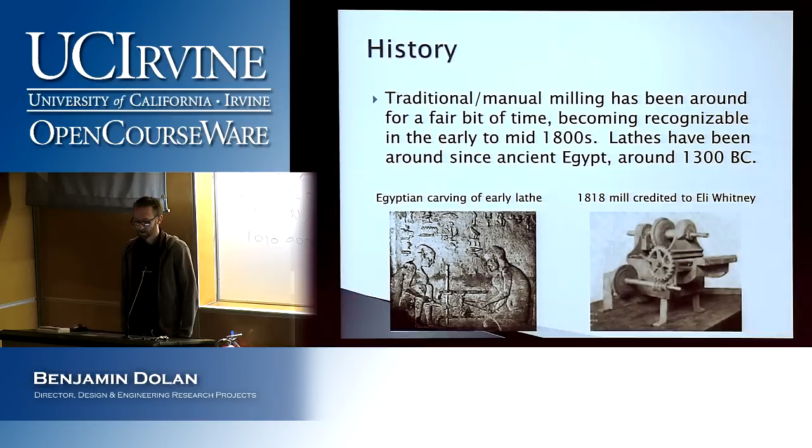So what really moved us from manual machining to CNC machining? That's national defense dollars, right? Anytime you can get the defense to say, hey, we need this, that technology is going to move quite a bit faster because they can put all sorts of money behind it. So it really kicked off after and around World War II.

And immediately after World War II, they were looking at, okay, computer numerically controlled machine, what can we do? And it used to just be called a numerically controlled machine. And we added the computer part around 1952. And that first machine, I'm not certain that the one on the bottom right is actually the first machine, but they ran off of old punch cards.

So you would have tape cards or punch cards, with a whole bunch of little pinpricks in them, and the machine would read that and translate that to instructions. They were apparently not terribly popular. You had generations of people that were used to manually milling everything, and now you're telling them, hey, you got to use this computer and this long tape with a bunch of holes punched in it to do what you're already doing. So it took a while to catch on, and it wasn't until the 80s when we got really closer to what we have now as CNC machining.

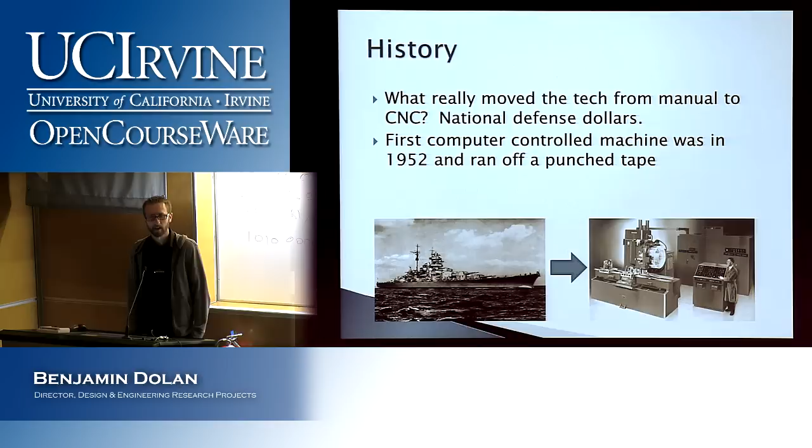So why would we do it? It is a lot of work to manually mill a fancy surface. So this helmet that you see on the right, this is a CNC'd helmet out of billet aluminum. It was done as a demo for either a 5 or 7-axis CNC machine. It is one of the more impressive CNCing videos that I've seen on YouTube. If you guys get a chance, look it up.

They kind of cheat. They don't show a lot of the finished work, and they just kind of Martha Stewart it, and poof, there it is. It looks great.

So why is it great? Having many axes available can simplify part holding and reduce the setup. So if you've only got a 3-axis mill and you've got a shape that has all sorts of convolutions and weird, nice, smooth surfaces, it can be a lot of work to figure out how to hold that shape so that you can machine one side, then rotate it so you can machine another side or whatever. And the more you machine away, the more difficult it gets to hold.

So you consider if you made something with a spherical dome on one side, and then you had features on the underside of that dome, you've got to think about, okay, if I machine that surface first, and I've got to flip it over, how do I grab a dome? It's really difficult. So you've got to do a lot of thought about how you hold these things that you want to machine.

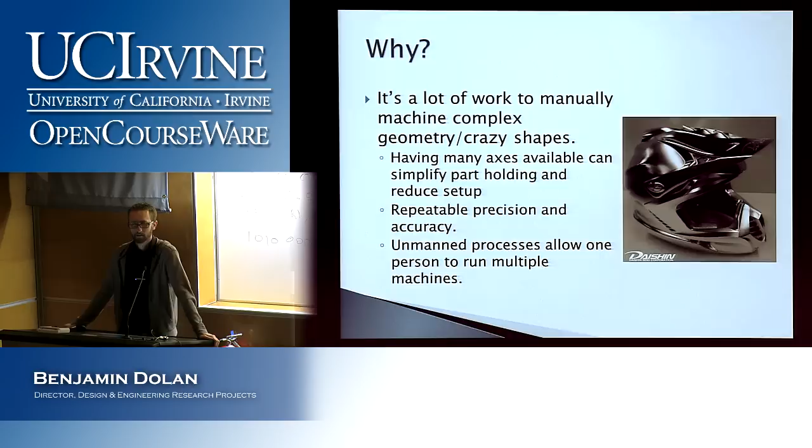This is really huge in the CNC lathe department, where they're making hundreds or thousands of pieces, where cycle times can only be a few seconds sometimes. And they'll just knock them out all day. And you check every 10th or 100th one, make sure it falls within spec, adjust your tools, and keep going.

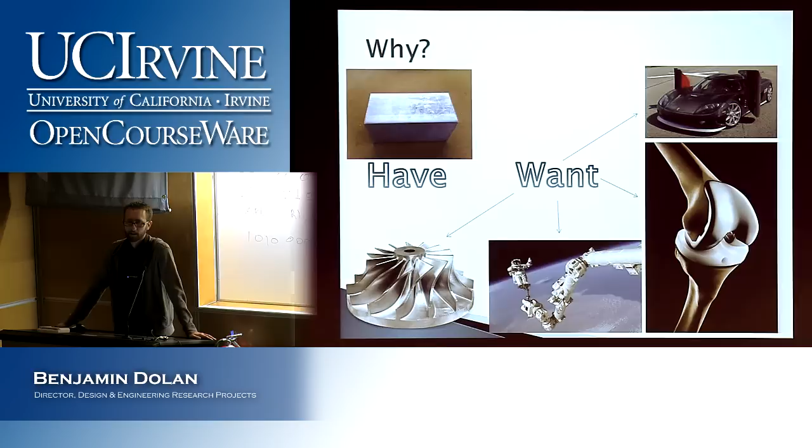So why do we want to do it? So if you've got a chunk of material on the upper left, and you want a car or a knee implant or the space arm or some sort of impeller, you've got to get from that block of billet to one of those shapes. So various fields that CNC machining impacts, of course, aerospace, automotive, medical, nautical, architecture, commercial stuff, art, many others. Pretty much anywhere where you need a lot of precision and repeatability.

And you start with a block of something and you've got to cut down. So unlike our last lecture where we grow everything up, here we're starting with a nice piece of stock and removing material to get to what we need. One of the advantages here also is the material is a known material. So if I specify Ti-6Al-4V, I know that I'm going to get that. Or if I want PEEK or ABS or acetal, doesn't matter. I start with a block of it and I cut it down.

It also helps with traceability. So in some fields, like aerospace and medical especially, it's really important to know the life of that material before it gets to whatever use. So a lot of times, if you order traceable material, it comes with a document that says, okay, this is what this material is, this is where it came from, and this is the life that it's seen.

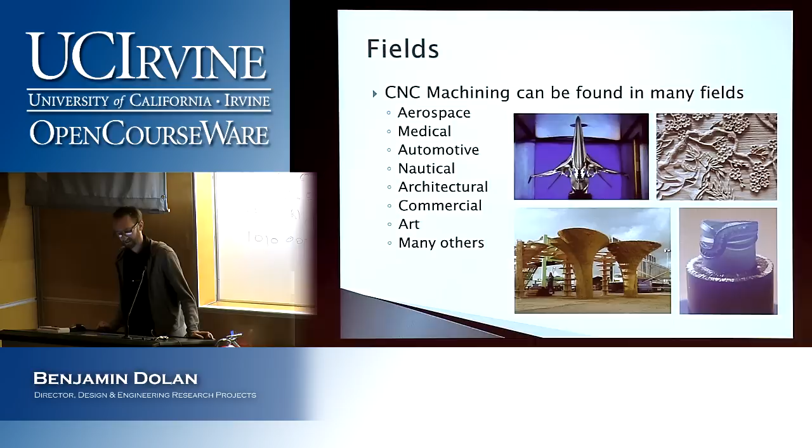So if you've got an F-15 and it crashes because the wing fell off, they can go back and say, why did that wing fall off? And they look at that material and say, look, where's the material data sheet for this thing? Where's its history? They go, I don't know. That's a problem. Or if you've got implants in humans, and you find out that, oh, look, that PEEK skull implant has collapsed. Why did it do that? I don't know. Let's find the paperwork. So super important.

So they can be easy to run and program the second time. The first time, it's typically a lot of work. Okay? As you get better at it, it gets quicker, of course. But I can guarantee that that helmet was ugly, ugly to program. They can be extremely reliable. You can knock parts out all day, over and over again.

You can change programs pretty quickly. A lot of things now, they're either fed through a serial cable if they're kind of older and it's a huge program, or they can be on a USB drive. Some of the machines around still use a floppy drive.

Numeric controlled machines don't take a lot of data. So it's literally just a text document that is a list of commands, and they are all coordinates and machine commands. So you may have heard G and M codes. Those are codes that tell the machine what to do. So you give them G and M and your X, Y, Z.

Or if you've got 3, 4, 5, 6, 7, 8, 9 axis machines, you get C axis and A axis and all these other axes. They get kind of funky. They can be very safe to operate. A lot of traditional machines had no guards or anything like that anywhere. So if you've got your nice long ponytail and you're operating a lathe and it happens to scalp you, that happens.

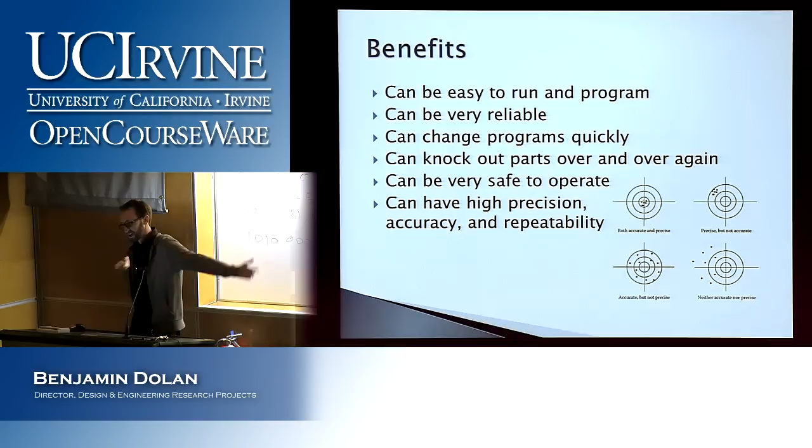So he described to me lathes where you actually rode on top of the tool. These things are large enough that you would sit on this little table with a giant tool going along this trailer basically. And he said the way that you tightened the tool was you took a 4x4 piece of wood and you pulled on it and pulled on it until it went crack. Okay? So super high precision right there. But it was good enough.

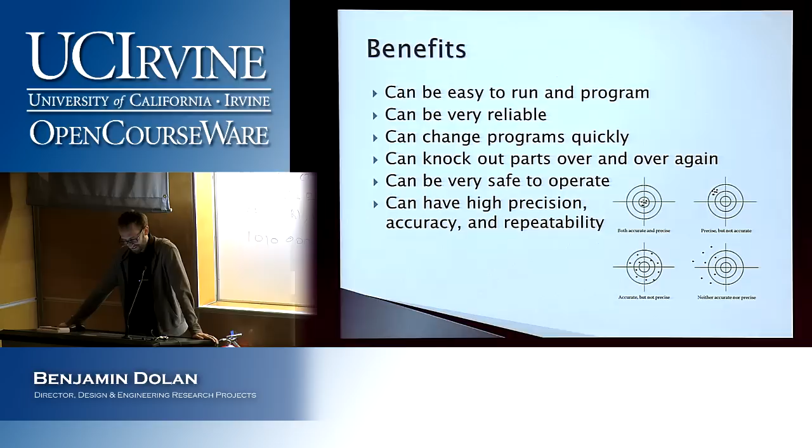So he said there were a lot of friends with, you know, partial fingers. And a lot of that's changed. I've still got all mine, and they're all OEM.

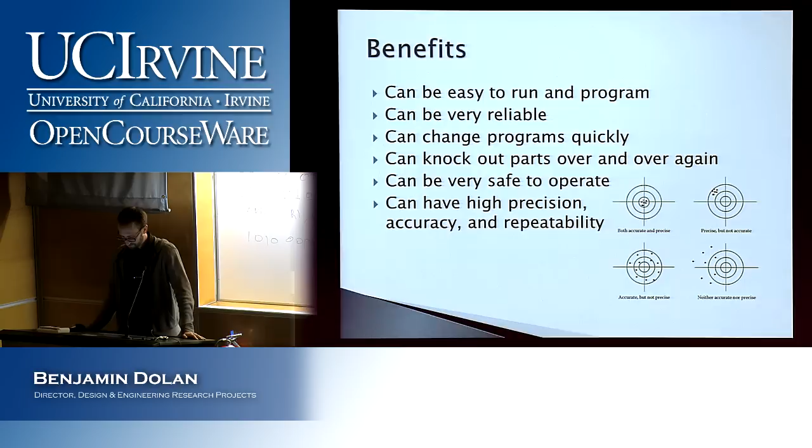What else? So the picture on the bottom there, you may have seen this before. It's accuracy and precision, accuracy or precision, and neither. So you always want accuracy and precision. If you're precise and not accurate, that means you did everything great over there, but you should have been over there. You can be accurate and not precise, which means on average you did pretty good, but nothing was really that close. And then if you're missing accuracy and precision, you just failed at life.

So important things to consider, obviously the cutting tools. Like, what are you doing on a CNC machine? You're cutting stuff. So the most important part, the things that you cut with. Hugely important is the diameter. You can't do really fine detail with a giant tool. The shape of the tool at the end, whether it's flat, ball, bullnose, tapered, a chamfering tool, a rounding tool, a filleting tool, whatever. The number of flutes.

So if you can see the mouse cursor, this guy only has 2 big flutes versus this thing has a whole ton of little flutes. And that controls quite a bit of how it cuts and how the chips evacuate and so forth. The tip geometry is ridiculously important. So it's not enough that it's just round or square. If you're using some sort of indexable end mill cutter, which basically looks like a chunk of metal with a bunch of little blades screwed onto it, there are companies whose entire livelihood is based on the shape of those little blades and the material that they cut.

The material itself of the tool, whether it's high-speed steel, carbide, some cobalt crazy thing, and then coating. As well as geometry, coating is hugely important. So whether it's some sort of nickel or cobalt or bare carbide or titanium aluminum carbide or titanium aluminum nitride, there's just this whole alphabet soup of different coatings that are specific to the material that you're cutting. So aluminum and steel don't like the same materials to be cut with. Titanium, Inconel, coppers, they all like different things.

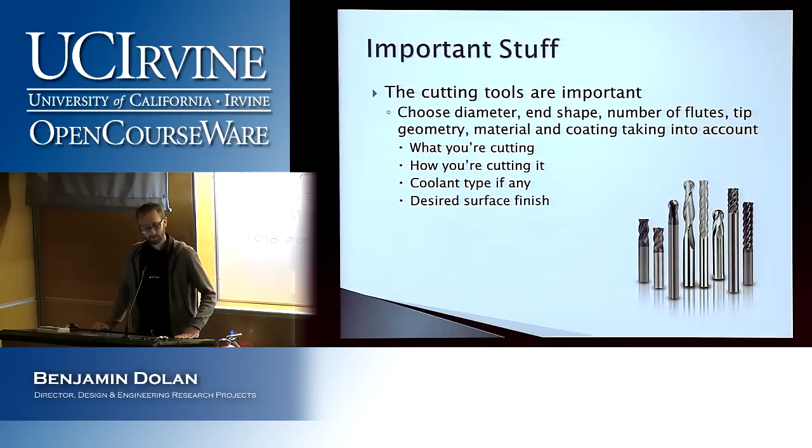There's water-based and oil-based coolants. A lot of people for indexable stuff will use air, and some of them use vortices to cool down the air so that it's below zero. And then there are ways that you can do it without coolant. I've seen at trade shows ceramic tools where they just dig it in, and there are sparks and all sorts of horrible things that you typically never want to see, and that's where that tool is happiest.

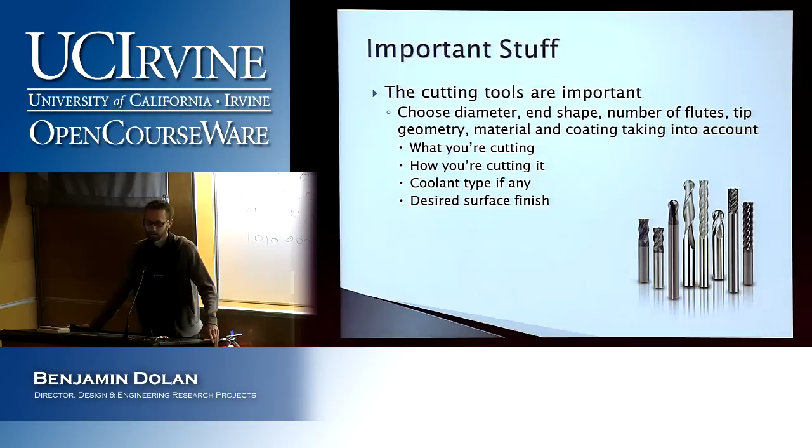Desired surface finish. Do you want it to look good, or is good enough? Okay. So there's roughing tools and finishing tools, and it just depends on how you're going to do it. So once you've got your tool, feeds and speeds. These puppies are super important. So there are plenty of old school tables that you can look up. There are online widgets and calculators and things like that. And a lot of programs now have them built in.

And it is, how should I say it? There are general rules of thumb where you look at the diameter and you look at what your machine's capable of, and it'll get you close. But depending on your material, the geometry of your tool, the life of your tool, either how much you want to get out of it or how much you've already sucked out of it, how light or aggressively you're going to machine, whether you have coolant on or not, and then what you're willing to sacrifice in terms of tool life, material quality, surface finish, time, etc.

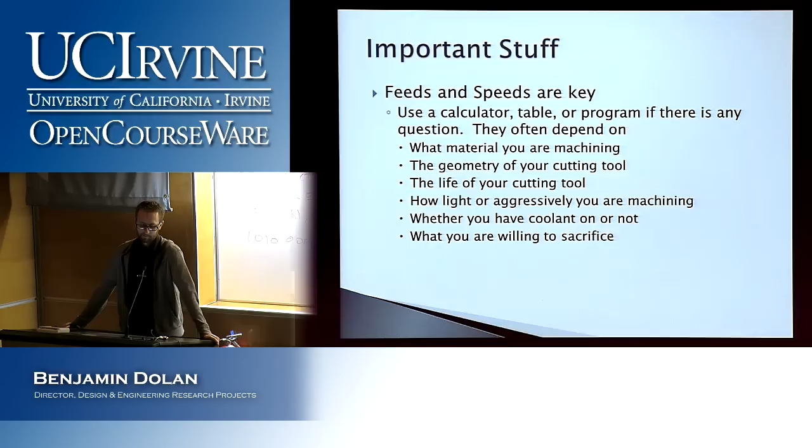All these things will dictate how fast and how hard you can run that machine, as well as the machine itself. If I've got my little 4-axis mill up there, I can't treat it the same as a $100,000 professional quality machine that would machine something like this. I've worked on mills where I could walk around inside. I can treat that mill with a lot more go than I can with the mill up there.

So, and again, choosing the right tool for the job. I'm not sure if you guys have had it yet, but I believe somebody was doing a talk about micro machining. So you can micro machine and you can go all the way up to very much macro. The boat industry and aerospace, as well as guys that make the giant windmills, they have some of the largest machines. So bottom right corner, that's a guy standing inside this mold. I wanted to say that was a boat hull, but it might also be a blade for a power plant. That machine, if I remember reading right, is about 150 meters long. And it's for doing full-size parts versus the stuff on the left, just little tiny doodly dads. I have no idea what they are.

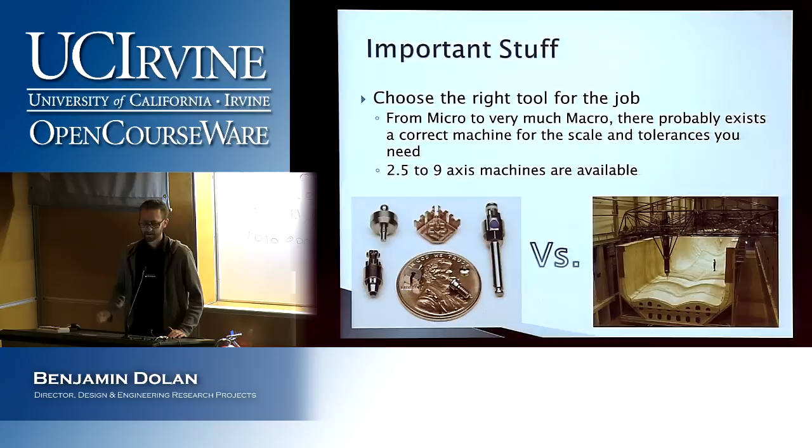Axis-wise, 2.5 to 9. So 2.5, think plasma cutters, routers, things like that. So you've got your XY control and there's some Z, but it's typically a fixed depth. Okay. 3-axis means you can do surfacing and things like that easier. 4-axis means you've brought in rotation. 5-axis, there's another rotation. 6, 7, 8, 9, you've got so many things going on, I have no idea. So if you think about degrees of freedom, we're used to 6. You've got all your translations and your rotations. So once you get above that, you're starting to include different movements of the heads. So think more like robot a lot of times, where they can do crazy things, and they have live tooling. So while this arm's moving over here, the head at the end of it's wiggling around, and it's spinning in different directions as well. Allows you to get really, really complex shapes.

So now we're going to go to the quick part. I believe Steve will be taking you guys through this. Again, Steve's the one that's doing the practicum. So you design your part. It doesn't really matter what you design it in, whether it's Rhino or SolidWorks or Autodesk software, whatever. You're going to export some sort of solid body or surface file into a CAM software. So many of you may have heard of Mastercam.

There are hundreds of others. We've used stuff called Visual Mill. There's SurfCam. I can't even think of some of the big ones right now. But you find one that you like and that you can afford. The afford part gets just silly. There are 6-figure CAM packages very quickly.

So simulate the machining, right? You've got this fancy computer. Make the computer figure out how to machine it the first time. You know, do all your paths, test it. See if it smashes into itself on the computer before you smash your actual tool into it. Save yourself the time and the money.

Get that data onto that CNC machine one way or the other. Whether it's a floppy disk, USB, serial, Ethernet, whatever. Just get it over there. Load that code. Depending on how you're cutting, maybe you need a sacrificial plate. So let's say you're cutting, like, a gear.

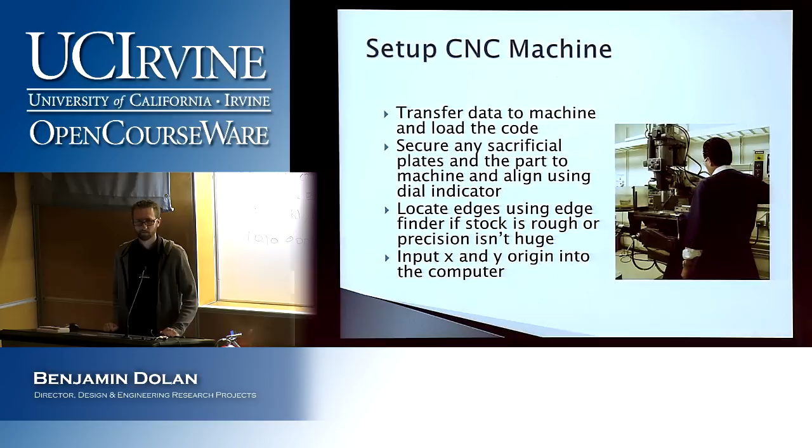Because imagine, okay, I've got a CNC program, I've saved it on my thumb drive, put it on the shelf. 5 years later, the guy calls back, wants another one, so I pull it out, and I assume my origin's over there, but 5 years ago I liked my origin right there. So I go to cut, and I just machine straight through the table or through my vise or whatever. That would be bad. Bad, bad, bad. So set it up.

Z height, incredibly important. So generally speaking, Z, it's always up for us. The origin, it's the top of your surface, okay? However, every tool you have has a different length, so they all have different Z's. So these are your offsets, and you have to set all the offsets for each tool that you're going to cut with. And you do that at the beginning, okay? Or you leave a little piece somewhere over there that you can touch off on later.

But if you have crazy different lengths, you machine some and then, oh, I forgot to figure out the length of the other one. There's now no surface for you to touch off on. So the Z height is unknown. That would be bad.

Another way to do it is with a gauge block, which is a highly calibrated little piece of metal. And you set it on top of what you're machining, and you bring the machine down until it just registers enough friction that that gauge block will move at one step, won't move at the next. That's your new Z height, and you just account for that extra thickness of that gauge block. That's the method I prefer.

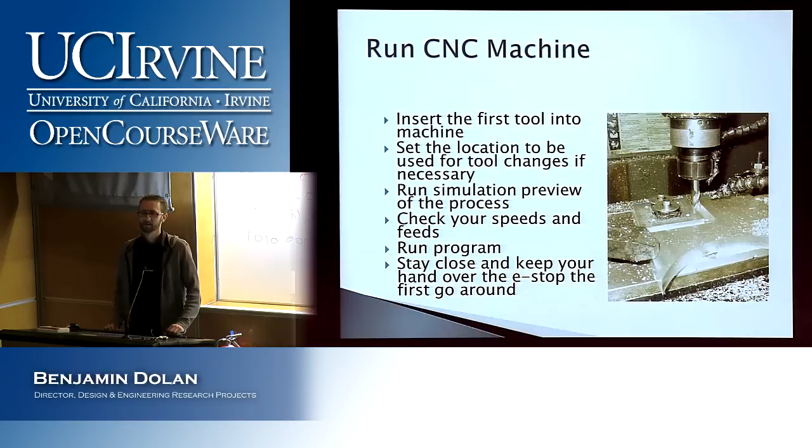And a huge thing on machining is your ears. You're listening for the way that it's cutting. After a while in a shop, you know exactly what it should sound like. You can listen and know the load. You can know how the chips are coming off. You can see if your coolant ran out, all sorts of crazy things, just by the way it sounds. So that being said, protect your ears.

Okay, safety gear, extremely important. You know, you don't want to have dangly necklaces or watches and long sleeves and safety gear. Protect your eyes, protect your ears. Wear gloves. Always important to take care of you. That way you can keep doing what you need to do.

So after that first tool's done, you go to the next tool. So maybe your first tool is a rough, your next tool is a slightly better finish. You want to run a smaller tool to get into the corners, things like that. And you keep doing that over and over. Once it comes off, you get to do your secondary or tertiary machining. This is the finish work. Maybe you got to clean up the backside, or maybe you're doing something that was a mill and drill and a turn operation. So you have a lathe and a mill working together. It doesn't matter. You just keep going until you're done.

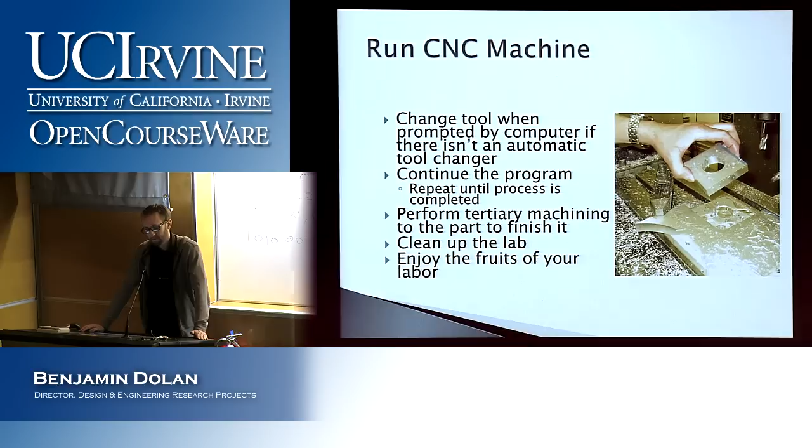And then lastly, cleaning up, super important. Okay, you don't want things rusting in your machines. You want to take care of the ways. The ways are the things that everything moves on. You don't want little pieces of metal stuck under them and then rubbing and rubbing and rubbing. It'll destroy your machine. And then you'll lose the accuracy and precision that you're trying to get. And then in the end, you've got your part and you're done. So we're done.

Any questions I can answer? Okie dokie.